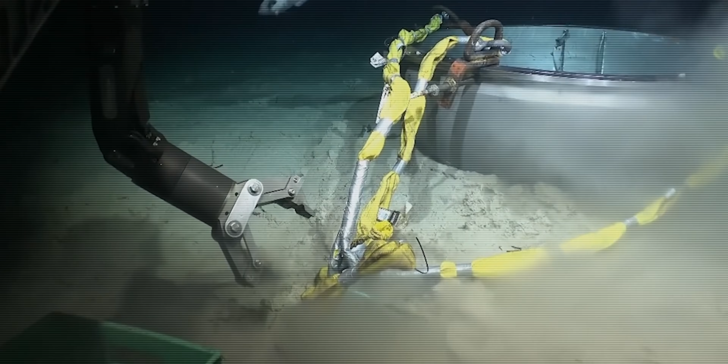Although those aboard Polar Prince heard what was later confirmed to be the sound of the implosion, no one recognized its significance at the time. The U.S. Coast Guard and Canadian authorities continued searching for 4 days, hoping Titan was disabled on the seafloor. It wasn't until June 22, 2023 that the search ended, when Titan's wreckage was located 1,600 feet from the bow of the Titanic, confirming what many had already feared. The submersible had suffered a catastrophic implosion, killing all 5 on board. Among them was OceanGate founder and CEO Stockton Rush, the man who had designed the experimental submersible.

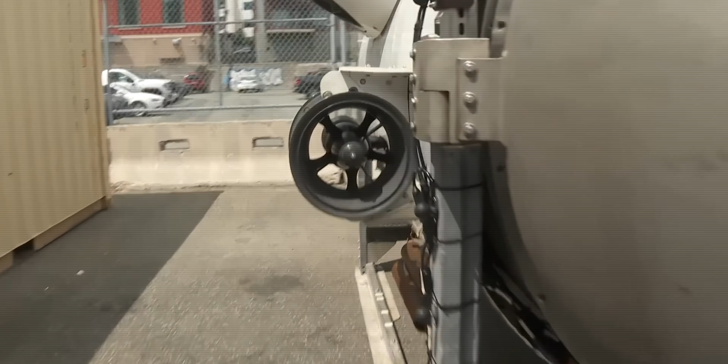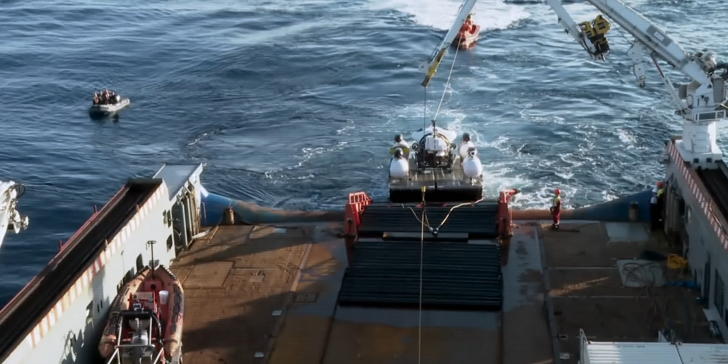3 years after the Titan implosion, investigators have finally pieced together what doomed OceanGate's submersible. 3 separate investigations have now reached the same conclusion, revealing a disaster that began long before Titan's final descent to the Titanic in 2023. The carbon fiber hull, often blamed as the sole cause, was only part of the story. In reality, the chain of events that ended in catastrophe was set in motion a full year earlier, during a dive from which everyone walked away.

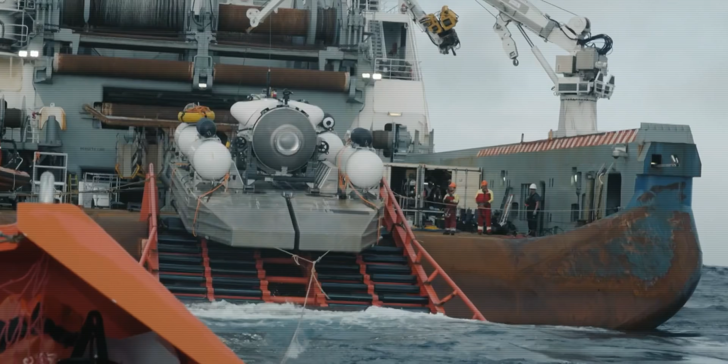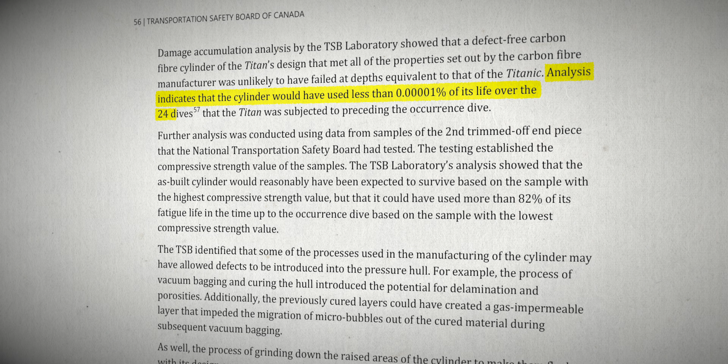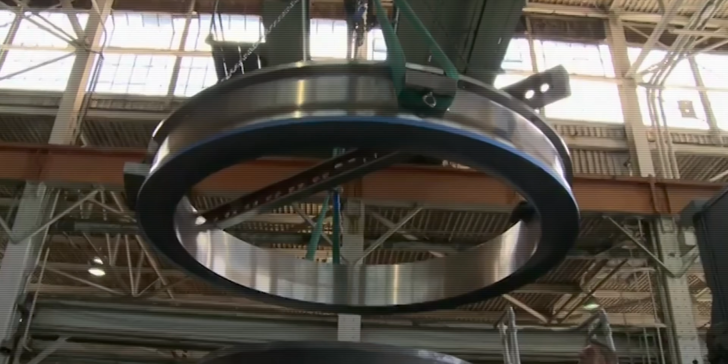One of the investigation's most significant findings challenged one of the earliest assumptions about the disaster. The Canadian investigation concluded that, under ideal manufacturing conditions, Titan's pressure hull was predicted to have a substantially longer fatigue life than it ultimately achieved. Before its final dive, the submersible had successfully reached the Titanic on 13 expeditions. Their analysis indicated that a defect-free pressure hull of the same design could have remained structurally sound for hundreds of additional pressure cycles. If the design itself was capable of surviving, what caused Titan to fail?

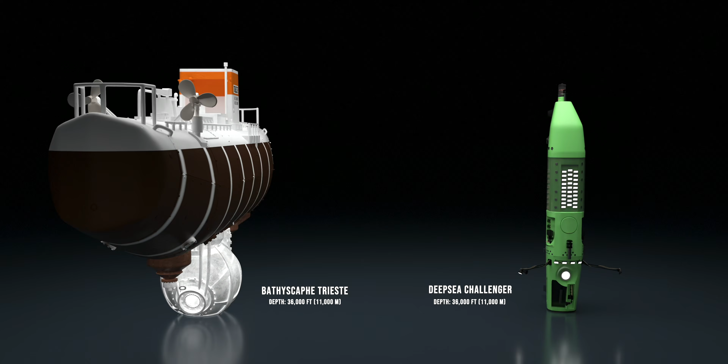Part of the answer lies in the geometry of the pressure hull. A cylinder subjected to extreme external pressure does not distribute stresses as efficiently as a sphere. The greatest deformation occurs midway between the supporting end caps, where bending stresses are highest. A spherical pressure hull, by contrast, distributes compressive loads almost uniformly in every direction, making it inherently more resistant to collapse. For that reason, virtually every successful crewed deep-sea submersible, from the bathyscaphe Trieste, which reached the Challenger Deep in 1960, to James Cameron's Deepsea Challenger, as well as Titanic diving submersibles such as Nautile, Alvin, and Mir, has relied on a spherical pressure hull.

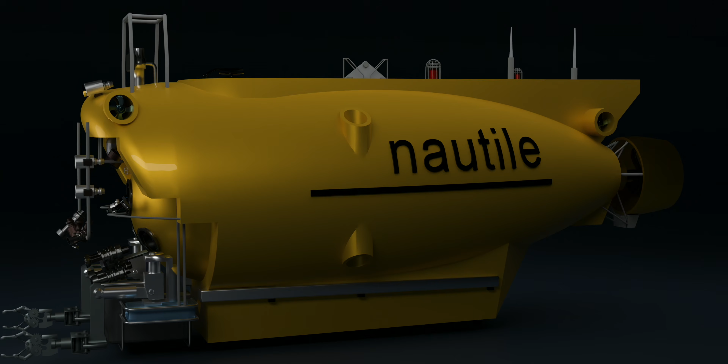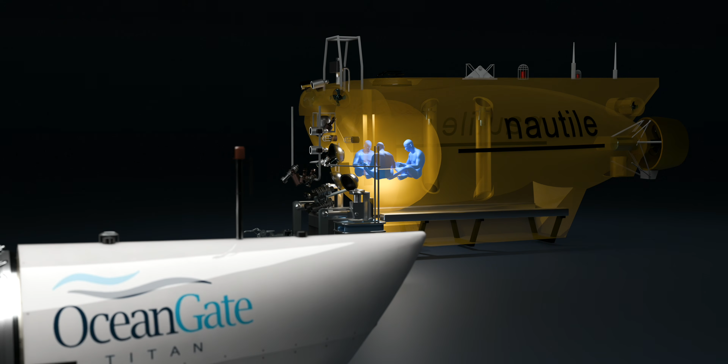OceanGate, nevertheless, chose a cylindrical design. The reason was largely practical. A sphere offers exceptional structural efficiency, but makes poor use of interior volume. A cylindrical cabin provides sufficient space for 5 occupants to remain together inside a single pressurized compartment, something that would have been difficult to achieve with a sphere of comparable size. That additional interior volume made the design far more attractive for commercial tourism, allowing OceanGate to carry more passengers per dive while providing a shared cabin experience. The trade-off was that the pressure hull became significantly more demanding to design, manufacture, and inspect.

Now, a cylindrical pressure hull is not inherently unsafe. Naval submarines have relied on cylindrical pressure vessels for decades. In fact, the Soviet K-278 Komsomolets still holds the record for the deepest dive by an operational combat submarine, reaching approximately 3,350 feet. That achievement, however, remains the exception rather than the norm. Most modern military submarines operate at depths of only a few hundred meters, with estimated maximum operating depths of around 1,500 to 2,000 feet. Even the record depth achieved by the K-278 was only about 1/4 of the depth required to reach the Titanic.

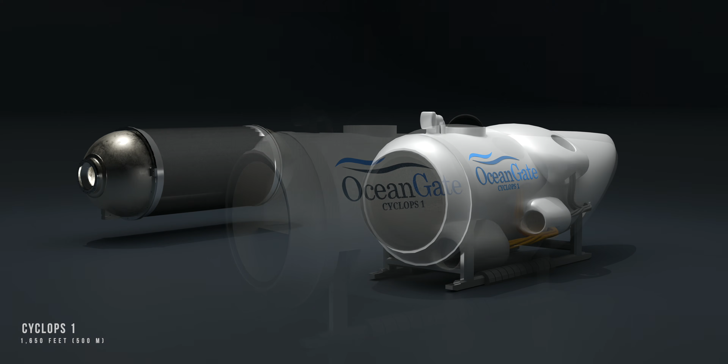OceanGate itself had already demonstrated that a cylindrical pressure hull could operate safely, but only at far shallower depths. Its first crewed submersible, Cyclops 1, featured a cylindrical steel pressure hull with a large acrylic viewing dome. Unlike Titan, however, Cyclops 1 was certified to depths of approximately 1,650 feet, less than 1/7 of Titan's intended operating depth. Why, then, didn't OceanGate simply build Titan from steel? The answer lies in the engineering trade-offs. A steel pressure hull capable of surviving nearly 13,000 feet beneath the surface would have required substantially thicker walls, dramatically increasing the vehicle's weight while reducing its usable interior space.

Carbon fiber composites offered the possibility of a lighter, roomier pressure hull capable of carrying 5 occupants to Titanic depth, a key advantage for OceanGate's commercial business model. What have you done to make sure Titan can survive a trip to Titanic? It's been a long process to ensure that Titan can go to the Titanic repeatedly and safely. We've refined the process so that we have extremely uniform 5-inch thick carbon fiber.

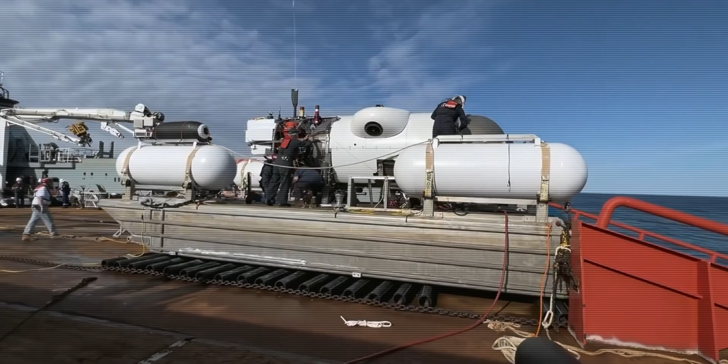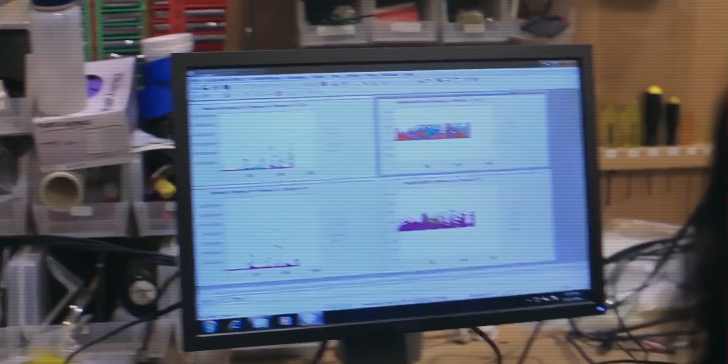Titan combined a demanding geometry with a carbon fiber composite pressure hull and titanium end caps, one of which was manufactured from Grade 3 titanium rather than the stronger Grade 5 alloy originally proposed during the design process. Individually, none of these design decisions guaranteed failure. Together, however, they left the submersible with significantly less tolerance for manufacturing defects, progressive damage, and unforeseen loads than conventional deep-sea submersibles.

There are certifying agencies, the Pressure Vessels for Human Occupation Committee, the SubSafe program in the Navy. These programs are over the top in their rules and regulations, but they had nothing with carbon fiber. So we had to go out and work on that. And one of the things I learned is, when you're outside the box, it's really hard to tell how far outside the box you really are. And we were pretty far out there.

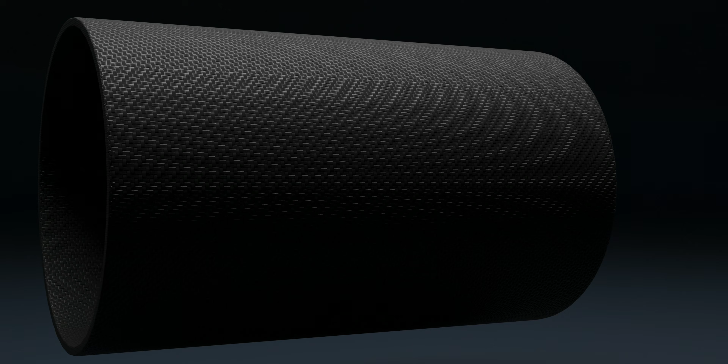The investigation reports indicate that carbon fiber itself was not the primary problem. Properly manufactured, it is one of the strongest structural materials ever developed, offering an exceptional strength-to-weight ratio that exceeds that of steel. The challenge lies in how composite materials fail. A carbon fiber pressure hull is not made of carbon fibers alone. Thousands of microscopic carbon strands are bonded together by an epoxy resin, which transfers loads between the fibers, keeps them aligned, and gives the laminate its overall shape.

While the carbon fibers provide most of the strength, the epoxy matrix is far more susceptible to microscopic cracking under repeated loading. As those cracks grow, the bond between individual layers can begin to separate, a process known as delamination, allowing damage to accumulate deep within the structure long before any signs appear on the surface.

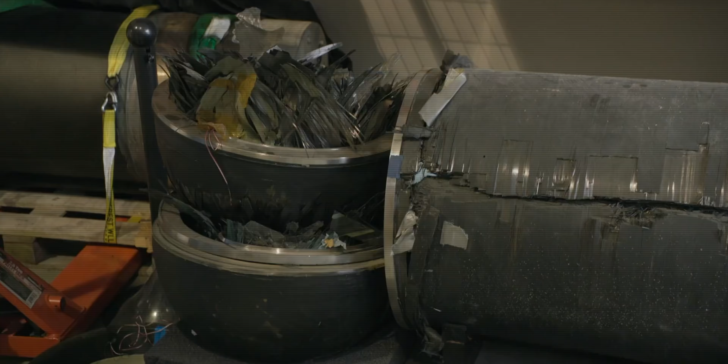Oh dear. What am I looking at? These are the results of some of our pressure tests. This is a 3rd scale model of the Titan hull. You have the cylindrical section, and you have the domes that we originally thought we could make out of carbon fiber.

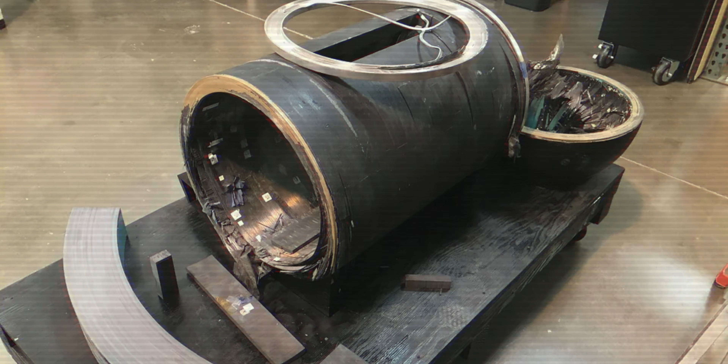The geometry of Titan's pressure hull further complicated this behavior. Unlike a sphere, a cylindrical pressure hull does not distribute compressive loads uniformly. Fibers wrapped around the circumference of the hull carried the external pressure efficiently, but the longitudinal fibers terminated at the titanium end caps, where they experienced complex stress concentrations. Those non-uniform load paths made the composite laminate more sensitive to manufacturing defects and progressive damage than an equivalent spherical pressure hull, in which compressive loads are distributed much more evenly.

Those stresses were repeated during every dive. As Titan descended, the pressure hull was subjected to immense external compression. During ascent, those loads were released. Unlike metals such as steel or titanium, carbon fiber composites can accumulate hidden internal damage that remains virtually impossible to detect through visual inspection alone.

Microscopic cracks can develop within the epoxy matrix. As that damage accumulates, the pressure hull loses stiffness, forcing the remaining intact fibers to carry progressively larger loads. Once enough of the laminate has been compromised, catastrophic failure can occur with little or no visible warning. So this would have been a sub you don't want to be in. This is true. But I assume also a valuable lesson, this test.

Yes, one element we were looking at is, could we predict the failure of carbon fiber? So a carbon fiber sub may work great for 1 dive or 10 dives or 100, but will it get soft like the deck of your fiberglass boat after somebody's been stepping on it too much? Right. And how do you know that before somebody gets hurt?

Right. And there's been a bunch of work on acoustic emissions. So basically we're listening to the sound of the carbon. They start popping and crackling. These micro-buckling pieces, little air bubbles go and fibers snap. And we found that you can tell quite clearly way before the carbon fails that it's going to fail.

And that would allow you to hear it. Yes. So if you get to 2,000 meters and it's making more noise than the last time you went to 2,000 meters, you can stop and go to the surface and say, we got a problem. Okay, so in the end, have you cracked the code? I think we've cracked the code.

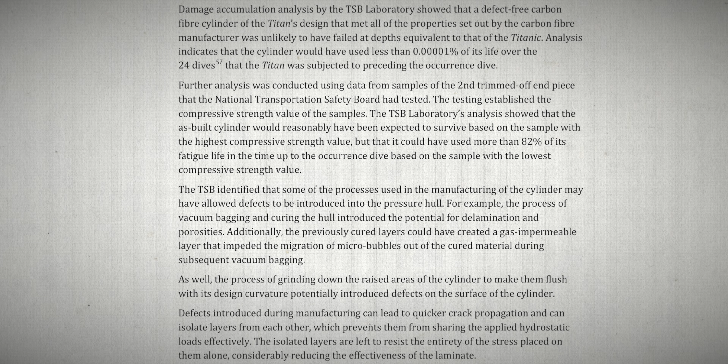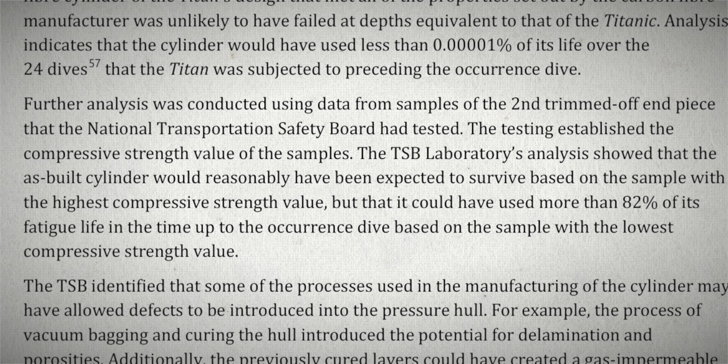The Canadian investigation compared an ideal pressure hull with the one Titan actually received. Imagine bending a paper clip back and forth. Every bend weakens it slightly until it eventually snaps. Engineers call that fatigue. Every dive to the Titanic was one more bend in Titan's pressure hull.

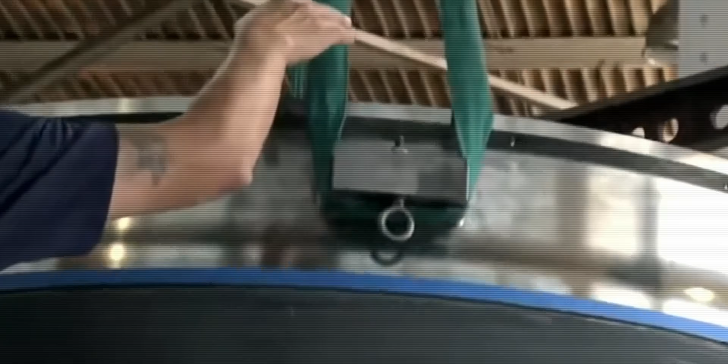According to the investigation, a perfectly manufactured hull would have barely noticed those dives. After 24 pressure cycles, it would have used only a tiny fraction of its expected service life, leaving hundreds of similar dives still ahead of it. Titan's actual hull told a very different story.

Based on the weakest material samples recovered from the wreck, investigators estimated that those same 24 dives may have consumed more than 80% of its predicted fatigue life. Instead of barely aging, the hull had already used up most of its expected lifespan.

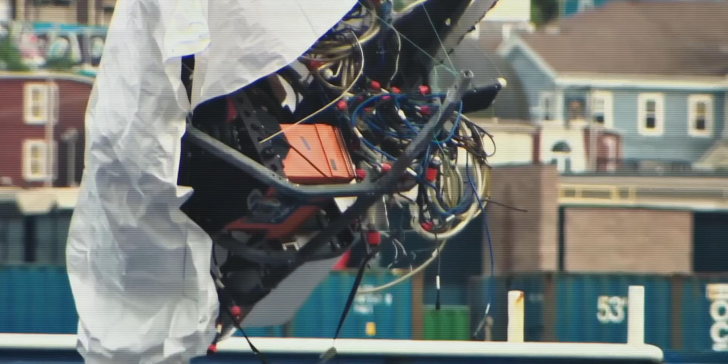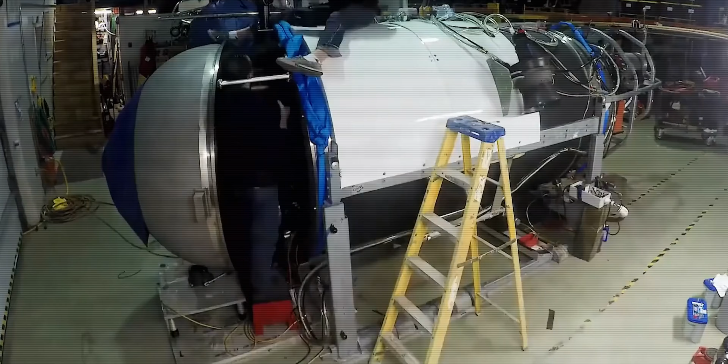The investigation also uncovered another problem. Engineers don't build structures to survive exactly the expected load. They build in extra strength as a safety margin. OceanGate's design called for a safety factor of 1.25, meaning the pressure hull should have been able to withstand about 25% more load than required. Testing showed the finished hull achieved only about 1.11.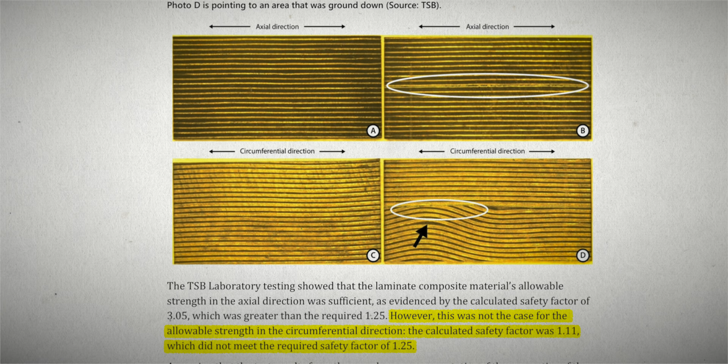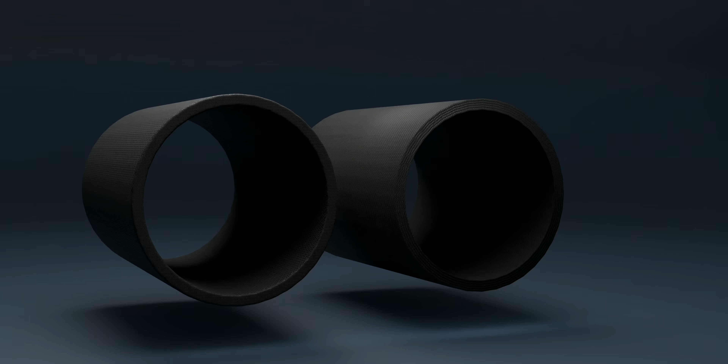That reduced margin did not guarantee failure, but it left the structure with far less tolerance for manufacturing defects, damage accumulation, or unexpected loads. The investigation also found that many of Titan's problems originated during manufacturing. Instead of being fabricated as a single 5-inch thick laminate, the pressure hull was built in 5 separate 1-inch sections, each cured before the next was added.

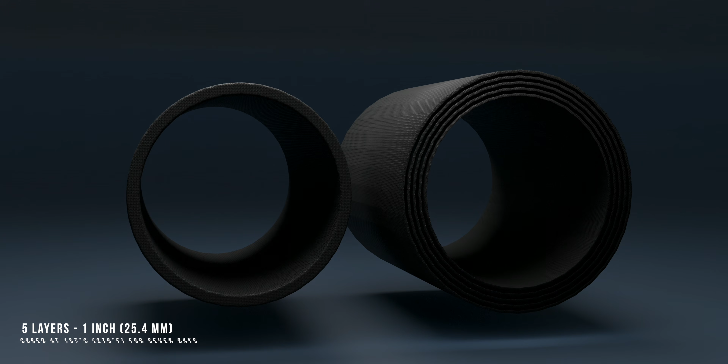This meant the innermost layer, the one subjected to the greatest stresses during every dive, underwent 5 separate curing cycles, repeatedly exposing it to heat that may have degraded its long-term mechanical properties.

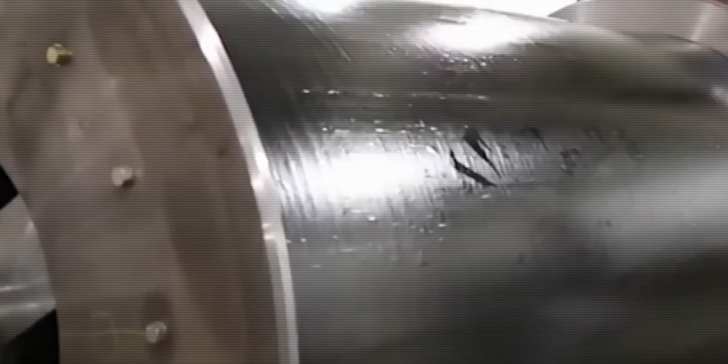In addition, during fabrication, sections of the carbon fiber developed wrinkles where the fibers buckled instead of remaining straight and aligned. Because composite materials derive much of their strength from continuous, properly oriented fibers, these wrinkles significantly reduced the laminate's structural efficiency. OceanGate attempted to correct these defects by manually grinding the wrinkles away.

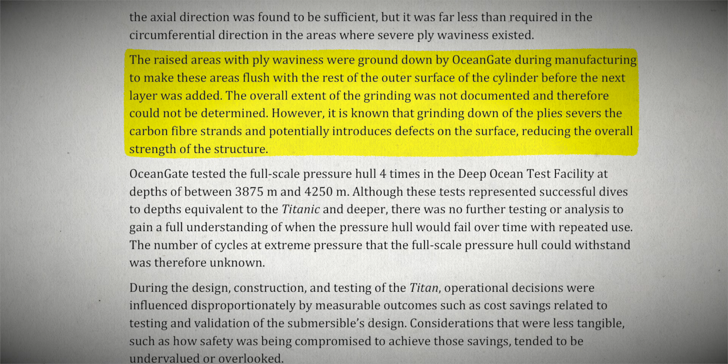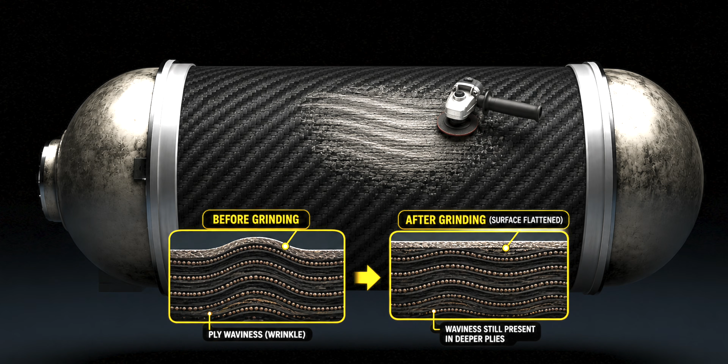However, the investigation found that this repair often displaced the distortion into the adjacent layer rather than eliminating it entirely. In some samples, investigators identified as many as 12 ground repair locations, suggesting that correcting one defect frequently created another deeper within the laminate.

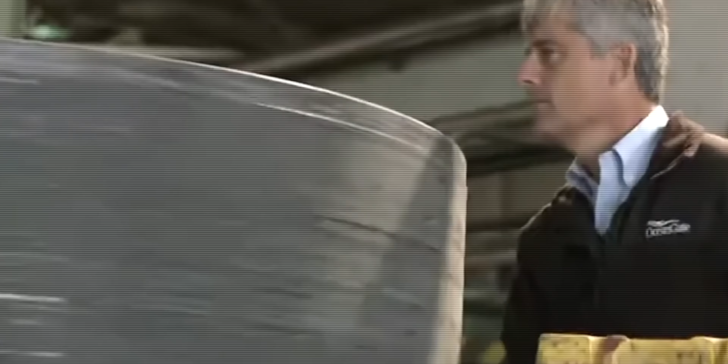Investigators also found numerous microscopic air pockets, known as voids, trapped within the epoxy resin. On average, these voids occupied about 2.7% of the laminate's volume, reducing the composite's overall strength. They also made the finished pressure hull too thick to fit properly inside the titanium interface rings. To compensate, OceanGate machined material from the outer surface of the hull, removing some of the very carbon fibers intended to withstand the immense external pressure.

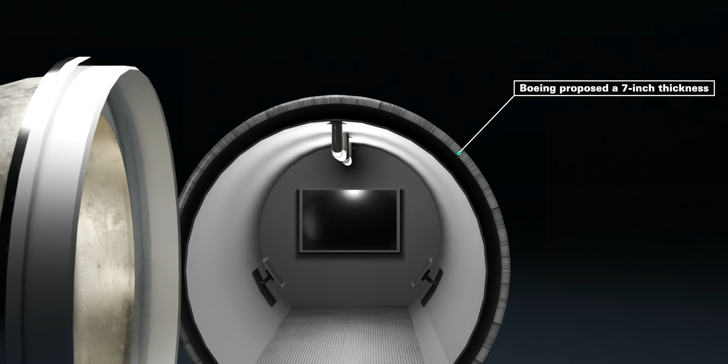Perhaps most significantly, the completed pressure hull no longer matched the original design. An early feasibility study by Boeing proposed a wall thickness of approximately 7 inches. Titan's production hull measured only 5 inches. The final design also omitted the plus-minus 45-degree carbon fiber plies originally proposed to resist shear stresses within the laminate.

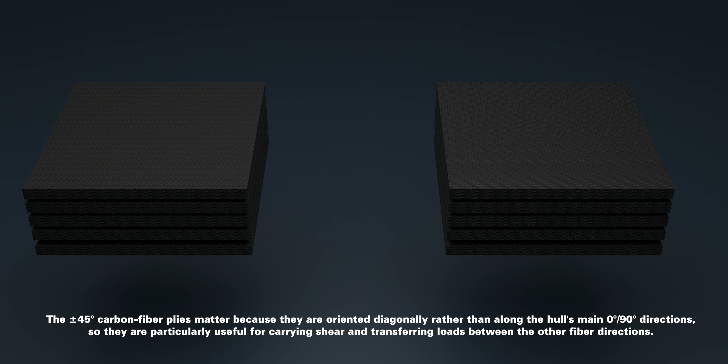When investigators asked why these changes had been made, no documented engineering justification could be produced, and Boeing had not been consulted after its initial feasibility assessment.

When investigators tested samples from Titan's pressure hull, they discovered that its strength varied dramatically from one section to another. The results ranged from 6.92 ksi to 12.05 ksi, a difference of nearly 2 to 1. In other words, some areas of the hull were almost twice as strong as others.

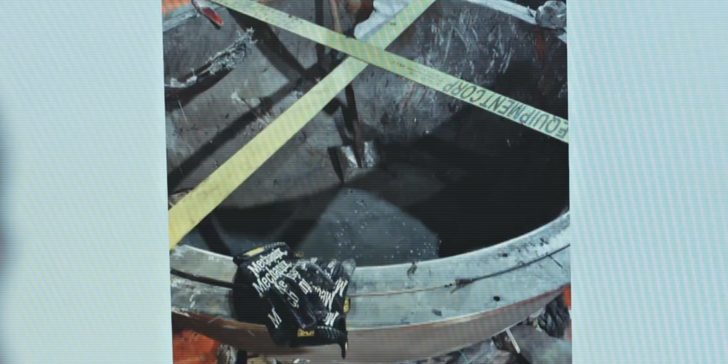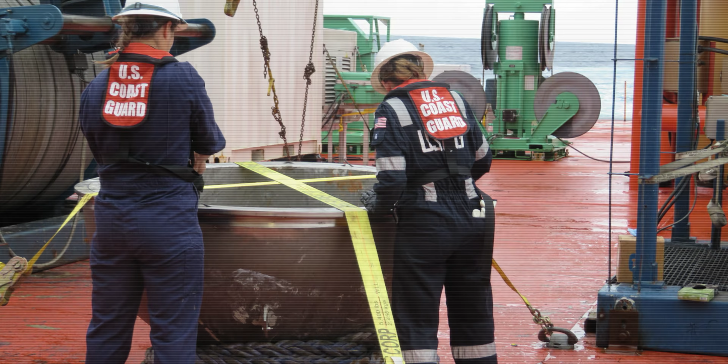In a structure designed to withstand thousands of pounds of pressure per square inch, that kind of inconsistency meant the hull could only be as strong as its weakest section. The significance of those findings became clear when investigators examined an earlier dive.

All right, good morning, everyone. Headed back to the Titanic. Right now, we did vessel checks this morning. A couple very minor anomalies, which is great.

On July 15, 2022, almost a year before the implosion, those aboard Titan heard a loud bang while ascending from Dive 80. OceanGate documented the event, but concluded that the pressure hull was simply settling into place, and operations continued.

When we got to the surface, Scott was piloting. He heard a really loud bang, not a soothing sound. No. But on the surface, and as Tim and PH will attest, almost every deep diving sub makes a noise at some point. You have just similar shapes and metals that are expanding due to thermal interaction, due to pressure changes, and it's quite common to have a noise.

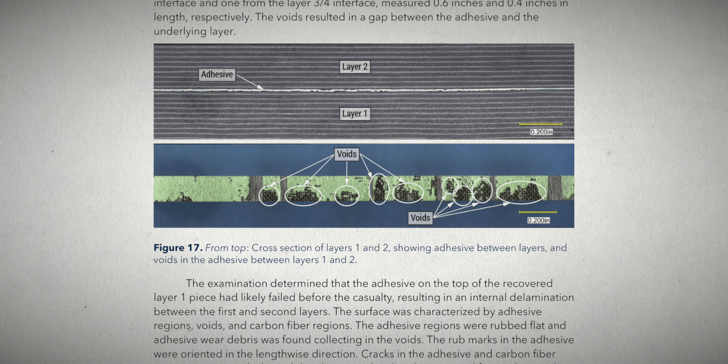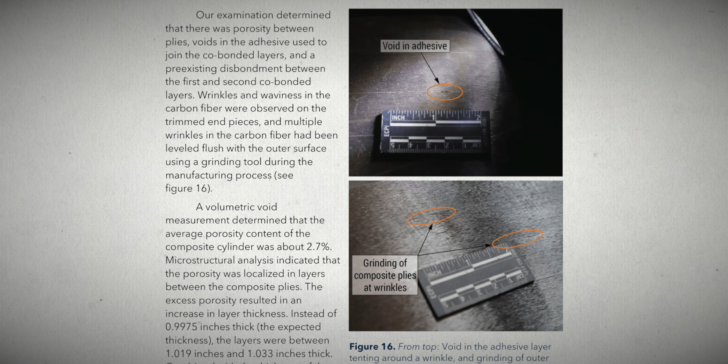The recovered wreckage told a different story. Investigators found extensive delamination between the first and second laminate sections, and again between the third and fourth, the same locations where manufacturing defects had been previously identified. Investigators also found wear marks and debris trapped between the separated layers, indicating that the laminate surfaces had been rubbing against one another before the final dive. These findings suggest that significant internal damage had already developed well before Titan's last descent.

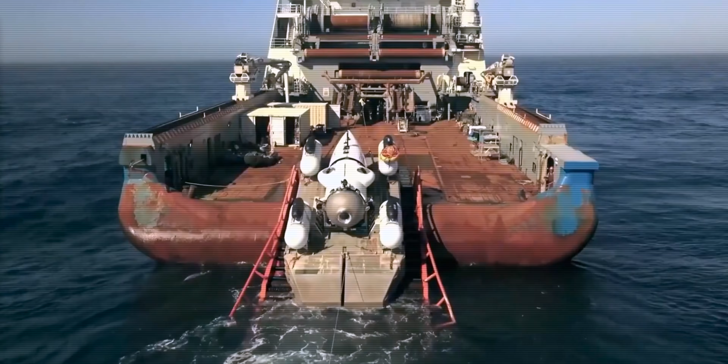Despite the acoustic event on Dive 80, the submersible returned to Titanic depth on Dives 81 and 82. Internal monitoring data from Dive 80 was not reviewed by OceanGate management. According to testimony presented during the investigation, Stockton Rush's response was, "Let's dive again and see what happens."

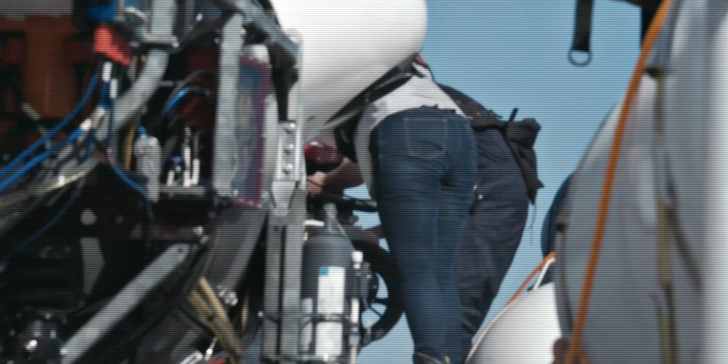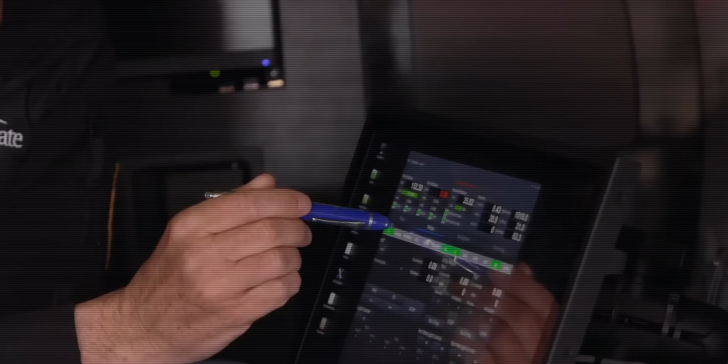As a safety measure, OceanGate equipped Titan with an acoustic and strain gauge monitoring system designed to detect structural damage before it became critical. Strain gauges measured how the pressure hull deformed during each dive, while acoustic sensors listened for the sound of fibers breaking inside the composite laminate. In theory, the system could provide an early warning of failure.

The problem was not the data, it was how the data was analyzed. OceanGate focused on strain against time during each dive. Investigators instead plotted the same data against depth, where external pressure steadily increases. The difference was striking. Before Dive 80, Titan's strain closely followed a straight line relationship with depth, indicating the pressure hull was behaving as expected. After Dive 80, that relationship changed. At shallow depths, roughly the upper 500 meters, the strain response became non-linear, while at greater depths, it remained largely unchanged.

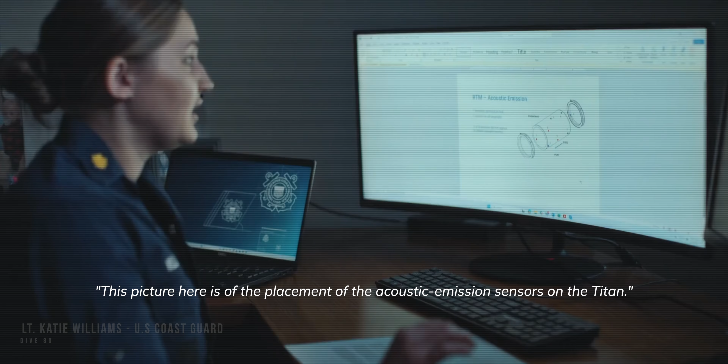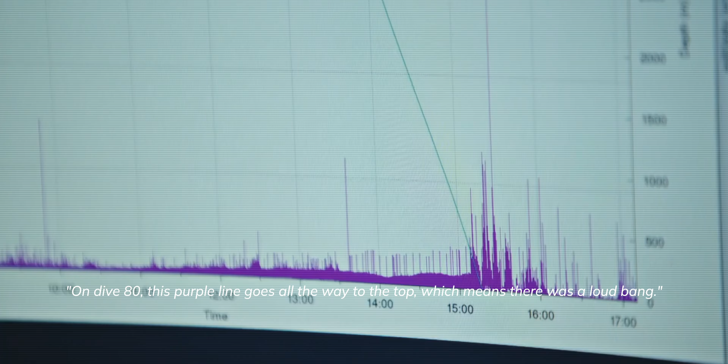This picture here is of the placements of the acoustic emission sensors on the Titan. The purple you see here, this is the acoustic emissions, basically the energy or acoustic data that was heard on Dive 80. This purple line goes all the way to the top, which means it was a loud bang. There is this huge amplitude.

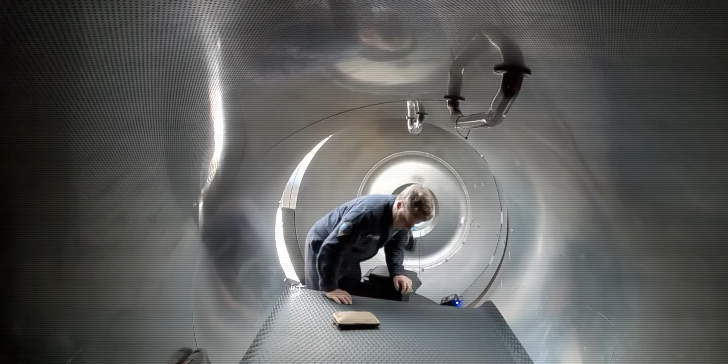Stockton Rush touted this system as it will let me know something is happening before something bad happens, right? Their system did that. Their system said there has been a fundamental change in the material of your carbon fiber, and it was no longer structurally sound like it had been prior to Dive 80. Delamination at Dive 80 was the beginning of the end. And everyone that stepped on board the Titan after Dive 80 was risking their life.

Near the surface, where external pressure was relatively low, the separated laminate layers were free to move independently. As Titan descended, the immense hydrostatic pressure forced those layers back together, temporarily restoring much of the hull's apparent stiffness. In effect, the damage became partially concealed at operating depth.

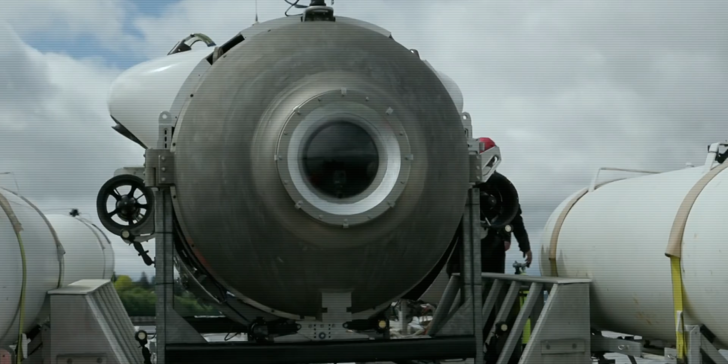When investigators compared the strain measurements with the acoustic monitoring data and the loud bang reported during Dive 80, they concluded that all three pointed to the same structural event. The pressure hull had already sustained significant internal damage nearly a year before the final implosion. Even after Dive 80, Titan continued operating under conditions that investigators believed may have worsened the existing damage.

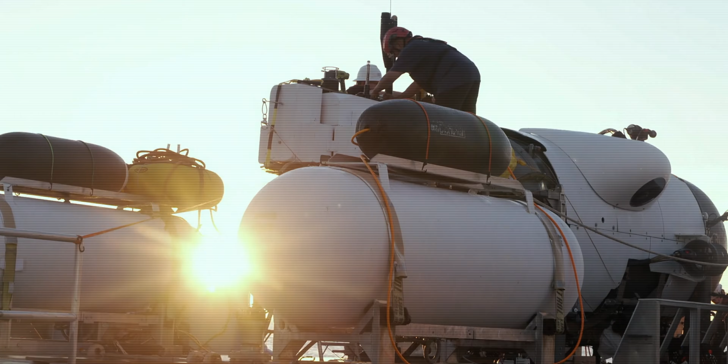Composite pressure vessels are typically stored in climate-controlled environments to protect them from moisture, sunlight, and temperature extremes. Instead, Titan spent the winter of 2022 through 2023 uncovered outdoors in St. John's, Newfoundland. Investigators noted that if water entered existing delaminations, repeated freeze-thaw cycles could have forced the separated layers farther apart.

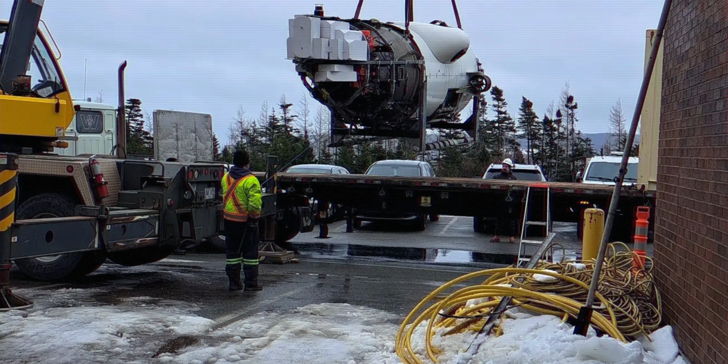The method of transportation also changed. Rather than being carried aboard its support vessel, Titan was towed approximately 900 miles across the North Atlantic behind Polar Prince. Already containing internal delamination, the pressure hull was subjected to continuous wave impacts, vibration, and bending loads throughout the voyage.

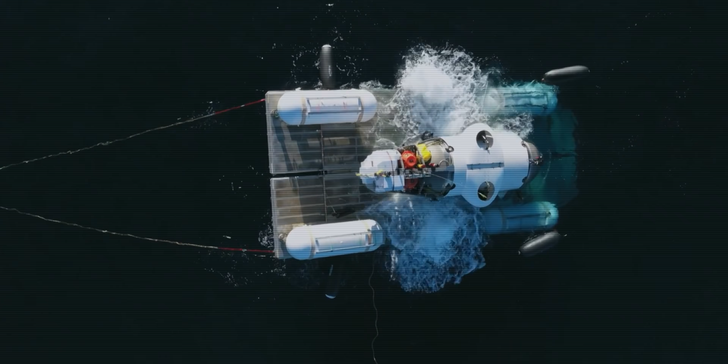During one launch, the submersible also repeatedly struck its launch platform for nearly 45 minutes. The National Transportation Safety Board concluded that Titan's pressure hull sustained additional damage after Dive 80, but could not determine exactly how it occurred. Whether caused by towing, environmental exposure, operational impacts, or a combination of factors, the result was the same. An already damaged pressure hull continued to deteriorate before its final dive.

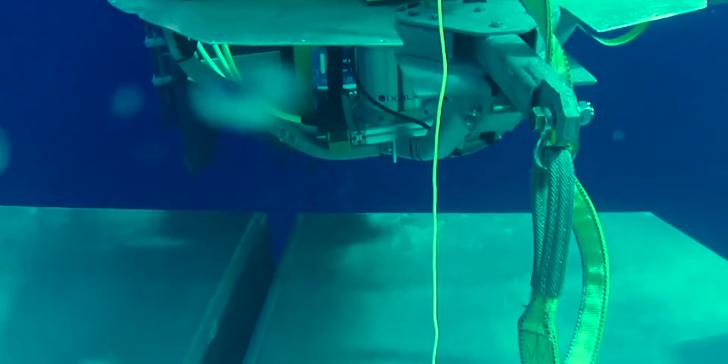OceanGate's safety philosophy relied heavily on real-time structural monitoring. Microphones bonded to the pressure hull were designed to detect the sound of carbon fibers breaking, while strain gauges measured how the hull deformed during every dive. In theory, the system would warn the crew before catastrophic failure occurred. Investigators found several problems with that approach.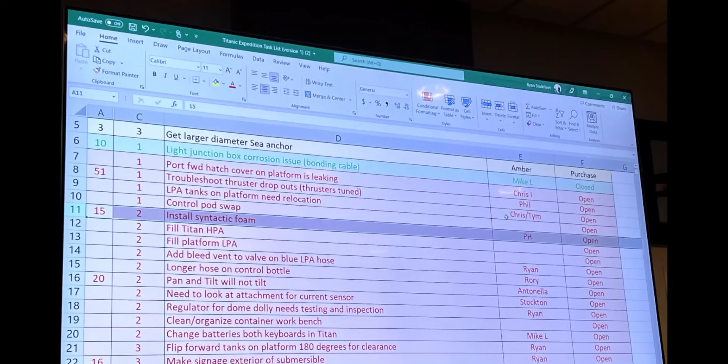3 of the 8 acoustic sensors were inoperative during the 2022 and 2023 seasons. The monitoring system erased its history after every dive, making long-term damage difficult to track. Acoustic events recorded on the surface were frequently dismissed as routine handling or docking noise.

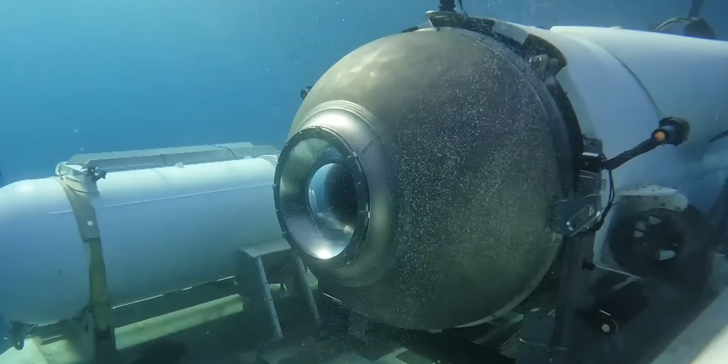More importantly, Boeing engineers testified that Titan's actual failure mode might not have produced the type of acoustic signature the system was designed to detect. In other words, the system was listening for one kind of failure, while the pressure hull may have been failing in another. The warning signs were already there.

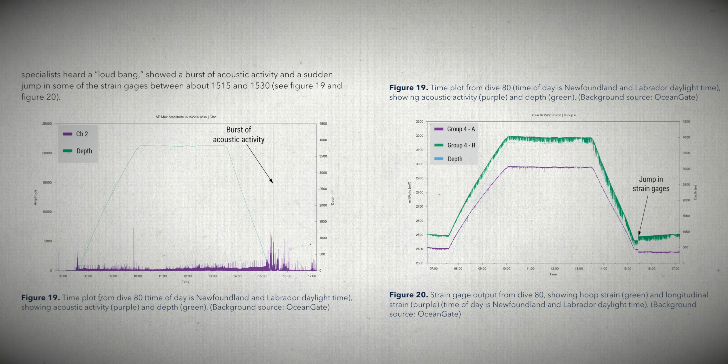Throughout the 2021 season, Titan recorded no significant acoustic events. After Dive 80, the pressure hull was no longer behaving as it had before. Investigators concluded that OceanGate had become increasingly accustomed to these warnings. In engineering, alarm systems that generate frequent false or unexplained alerts eventually become background noise. Instead of triggering a comprehensive investigation, Titan's growing number of warnings became part of normal operations.

The final irony was striking. Titan's onboard monitoring system never identified the failure that destroyed the submersible. Yet a U.S. Navy hydrophone array nearly 1,450 kilometers, about 900 miles away, detected the acoustic signature of the implosion within minutes of the loss of communications.

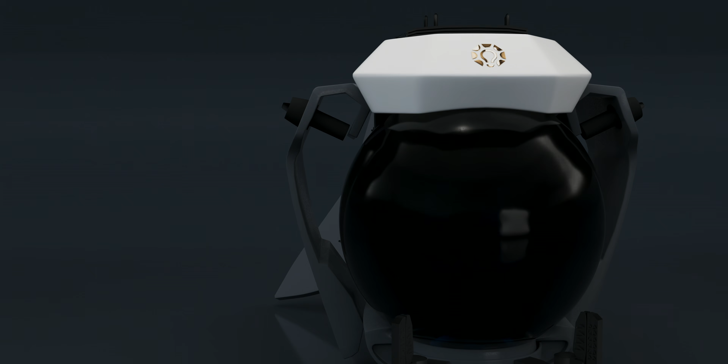Titan's loss did not mark the end of crewed exploration of the Titanic. Later this year, Triton Submarines plans to return to the wreck with its new Triton 4000/2 Abyssal Explorer. Designed to carry 2 occupants to depths of up to 13,000 feet, the submersible takes a fundamentally different engineering approach from every other submersible. Rather than relying on steel, titanium, or carbon fiber, the Abyssal Explorer features a fully transparent spherical pressure hull made entirely of acrylic.

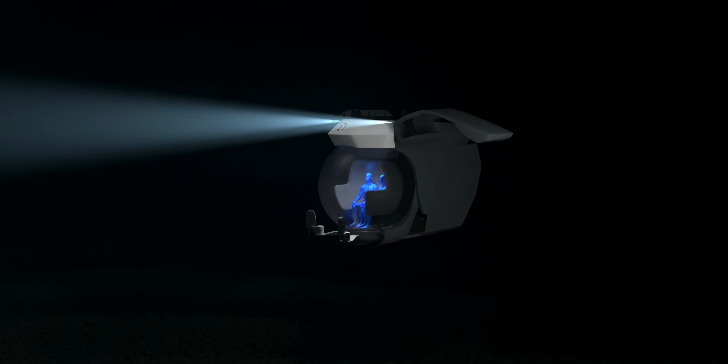Traditional deep-diving submersibles typically house their crews inside steel or titanium spheres, viewing the outside world through relatively small acrylic windows. Triton's design instead makes the pressure vessel itself transparent, providing an unobstructed panoramic view while retaining the inherent structural advantages of a spherical hull. The submersible measures 15 feet long, 9 feet wide with its gull wings retracted, and 20 feet wide when fully deployed.

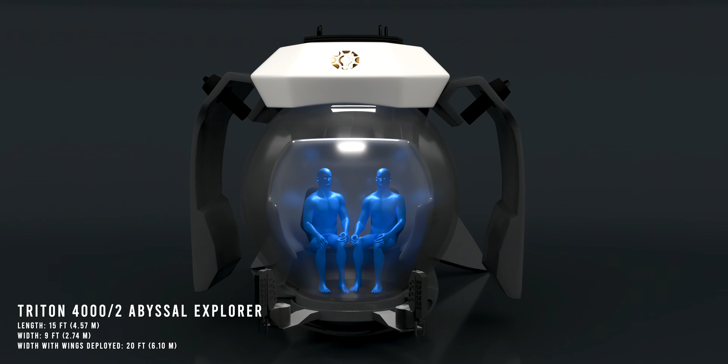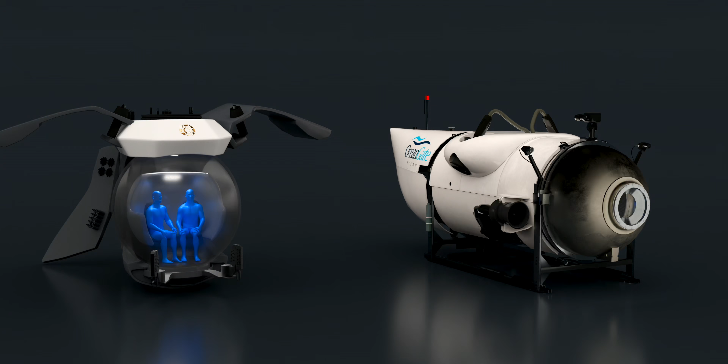Its weight is approximately 26,500 pounds and it is capable of remaining submerged for more than 12 hours using redundant life support systems. A unique silent glide mode allows the submersible to coast through the water with minimal thruster use, reducing noise and disturbance during scientific observation and filming. The concept is unprecedented for a submersible operating at Titanic depth, and its unconventional design has inevitably drawn comparisons to Titan. The similarity, however, largely ends there.

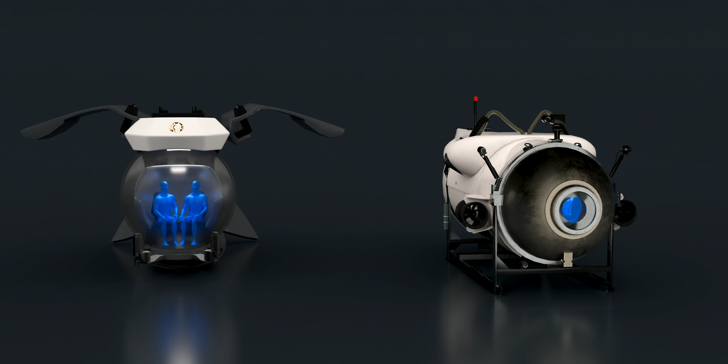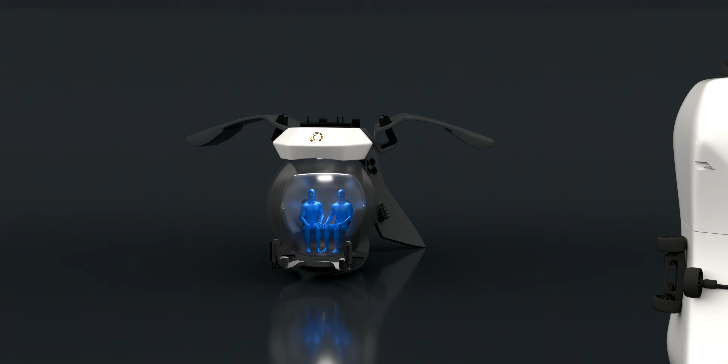Unlike Titan, the Abyssal Explorer is undergoing independent verification and certification to internationally recognized standards. Triton has already demonstrated its engineering capability with the Limiting Factor, the first commercially certified crewed submersible with a pressure hull tested to withstand up to 46,000 feet. It's been widely marketed as having unlimited depth rating, diving multiple times to Challenger Deep.

The technology to reach the Titanic safely has existed for decades. The investigations into Titan did not conclude that deep-sea exploration was inherently too dangerous. They concluded that engineering discipline, rigorous testing, independent verification, and conservative design margins remain essential. The central lesson of the Titan investigation extends far beyond a single submersible.

The Titan disaster has now changed how composite pressure vessels, structural health monitoring, and privately operated deep-sea submersibles will be evaluated for years to come. If the lessons identified by these investigations are applied, that knowledge may ultimately help prevent another tragedy.